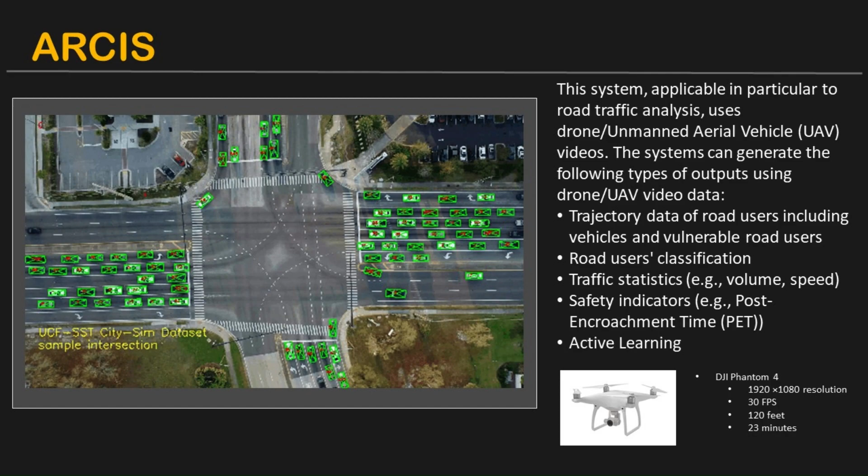Okay, so this is the software basically. So we do a lot of steps in order to use this software. This one is a really sophisticated software, and we have the ability...

When you fly a drone, the drone is moving, right? So you have to stabilize the video, because the drone with the wind sometimes is moving. So this is the first step, and then we have the ability also to stitch videos from many drones so that you have a long segment that you want to study.

And then we obtain the trajectories and all the statistics, and then we use that for data visualization and calculating the TTC, etc. So it's very sophisticated, and then also we have active learning to improve so that the system improves as it runs more and more.

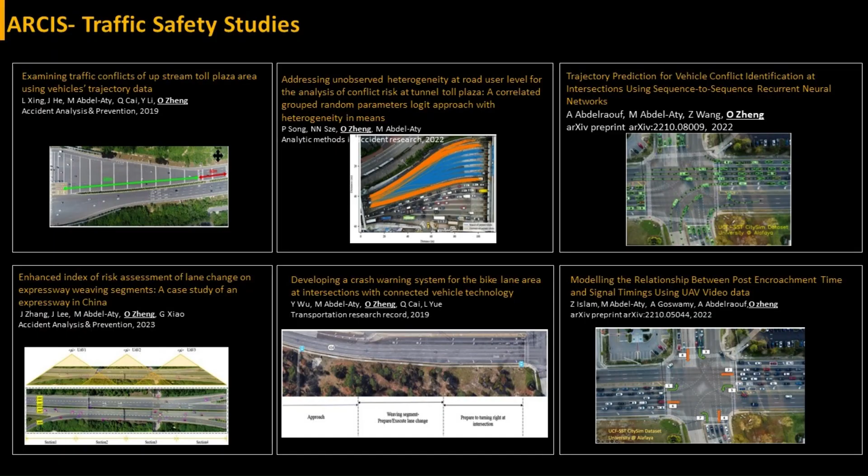This is some of the locations that we analyzed using these videos, and you can see these are all now papers. I can tell you the first one is the approach to a Toll Plaza in Nanjing, China. And the second one is the approach to, I think, a tunnel in Hong Kong.

You are familiar with this place? Really? It's your advisor, right? Yeah, so Sze, Tony Sze is her advisor, who is a co-author on this paper.

This is an intersection in Florida. And I think this is also an intersection and a bike lane in Florida. Then this is a weaving section in China, I think in Chengdu. And these are three drones, so in order to cover the whole weaving area, we have to fly 3 drones and then look at the whole video.

By the way, this data we opened it, so it's online. If you are interested to study any of these locations and get the trajectories, we can provide you these trajectories. We first used it ourselves, tested it, etc., then we opened it for researchers. So far, about 100 university research institutes and vehicle companies are using this data set. So this is a resource available for you.

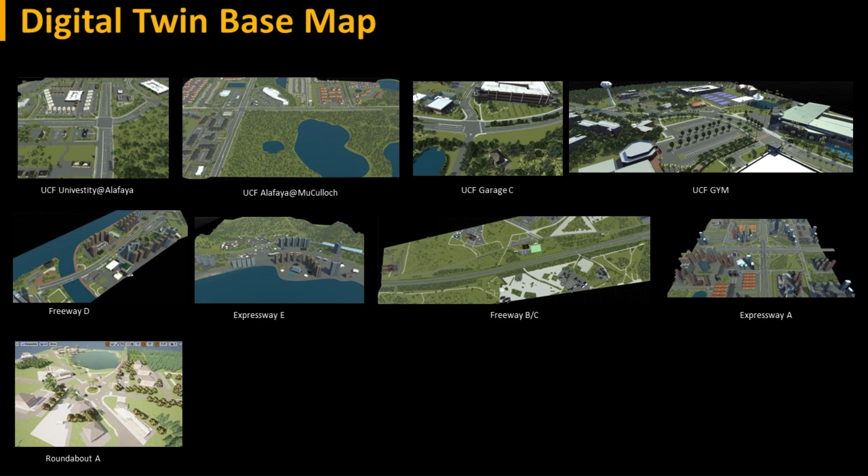Another system we developed uses roadside cameras, and not only roadside cameras, but CCTV cameras. Many video systems install high resolution specialized cameras on the side of the road, but I'm not very interested in that because these are expensive. I'm interested in the CCTV cameras that the government already provides for traffic management. These are free, right? How can we use them to improve our applications in transportation?

To give you an idea, in Florida we have 18,000 cameras on the road, as if you have 18,000 people looking 24/7. And machine learning is the brain, right? So you're thinking, you're looking, you can do everything, you can capture everything you want. This is where we are heading.

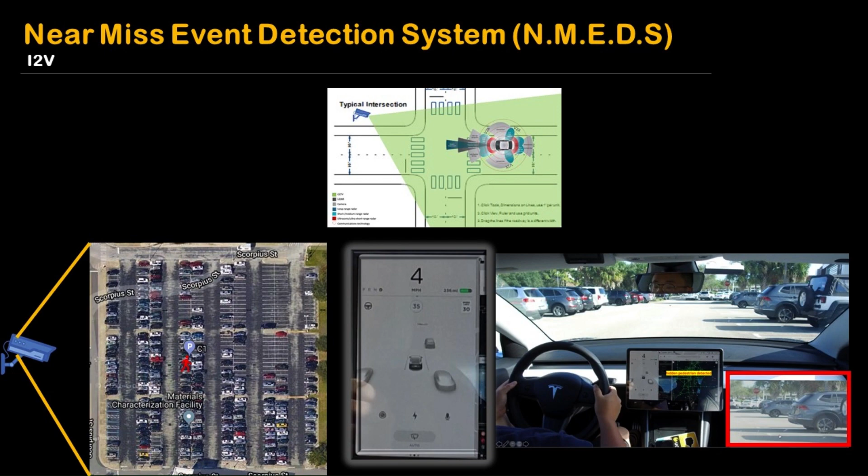So if you work with safety and you have a problem, you discover there is an intersection that has a lot of accidents. You report it to the government, or the government notices the statistics and says this intersection has a problem because over the last 3 years we've had more than 50 accidents per year, and maybe a few people were hurt. So this is the first step. After 3 to 5 years you discover there is a problem. You bring in a company, a consultant, and they do a study, take a lot of money, and tell the government now you need to change that.

So you change that, pay them more, and then you have to wait another 2-3 years to see whether the accidents went down or not. This is what's called a before and after study, very typical in safety. But guess what, how many years did you wait, and how many people got hurt before you concluded whether the problem is solved or not? This is very inefficient. With a lot of intersections, a lot of drivers, a lot of problems, you cannot keep up. You cannot spend all the money at all the intersections.

It's impossible. So here what we are suggesting is we either fly a drone or look at the CCTV, and using machine learning and computer vision, we determine what the problem is. So fly for 2 days, 3 days, a week, and collect these videos, processing them with our software.

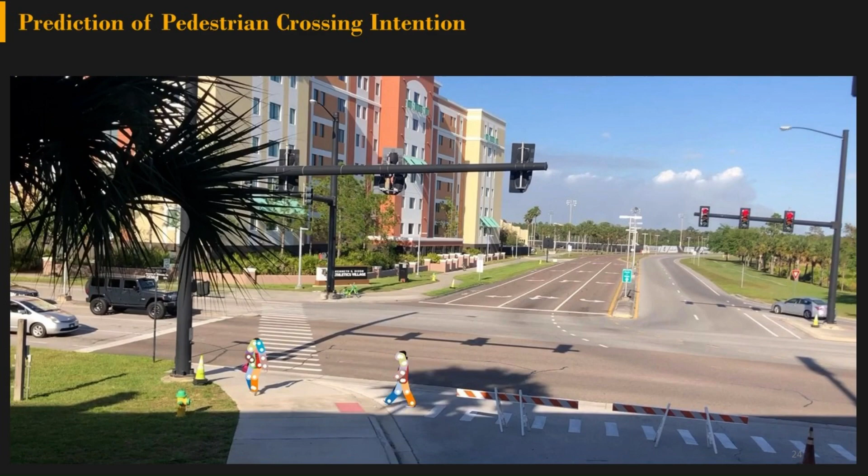Then you fly the drone for another couple of days and the problem is gone. So in 2 weeks you achieve what we used to do in 5, 6, 7 years, at very low cost. So this is an efficient way to do safety evaluation.

Another application is using cameras to help autonomous cars. As you can see, the autonomous car on top has all these sensors - you see this picture a lot. The autonomous car is moving, all the lidars and cameras covering this area. You can see all these shapes are basically what the car is seeing around it.

Now, what if this car intends to turn right, and there is a pedestrian at the corner crossing the road? The car cannot detect that. But the camera on the road, showing all this green area, can see it. So the solution is that the camera detects the pedestrian. Using connected vehicles, this information goes to the autonomous car, so the autonomous car knows there is a pedestrian around the corner. This means autonomous cars by themselves cannot operate in all situations - we need help from the infrastructure, and the camera will be that help.

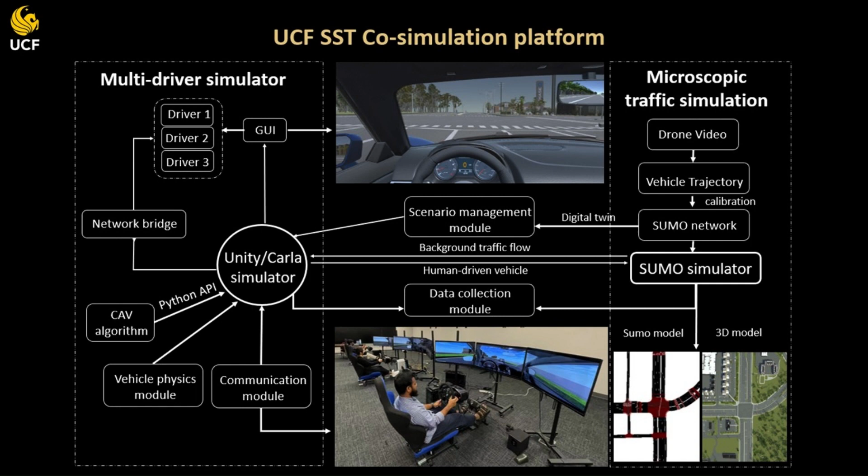So basically, 3 drivers are connected to each other. At the same time, the micro simulation is running and generating vehicles that appear in their scene, driving scenarios. Remember the open data set and digital maps for the different locations? We can drive them now because we are modeling this using Unity.

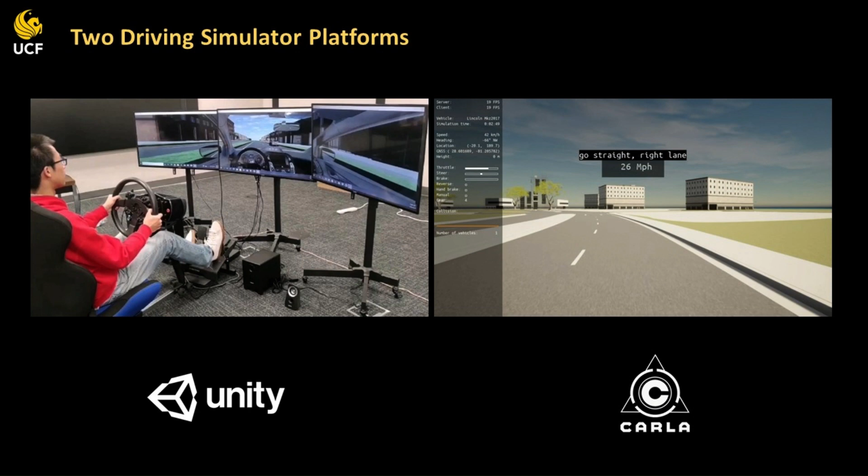There's a lot of connections between the systems, and what I'm not showing here is that the whole system is connected to a cave, a room in a different lab where we are simulating the pedestrian. The pedestrian is walking in this cave, and the driver here sees the pedestrian crossing the road or approaching the vehicle, while the pedestrian sees the vehicle in this lab approaching. So pedestrian-in-the-loop simulation is also doable with this system.

And this helps us create what's called digital twinning. You are basically representing reality in the digital world, and then you take something from the digital world and implement it in the real world. This connection between the digital and real world is the digital twinning we are talking about.

Some animations here to show you the Unity platform and Carla platform. Again, the 3 connected simulators. These are all students in my lab, and these are the digital twinning examples I was talking about.

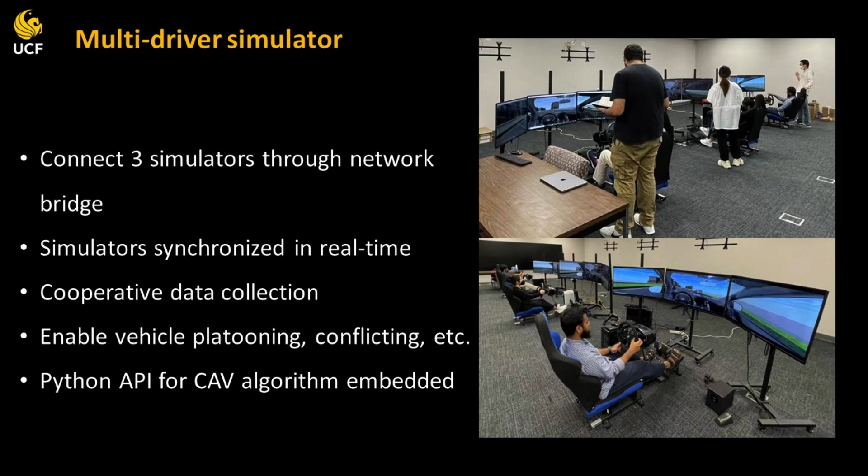And then we use SUMO to generate the traffic that the driving simulator drives in. By the way, a side note: we don't use traditional calibration and validation anymore for traffic simulation. So instead of counting the number of vehicles, we use drone trajectories to calibrate the micro simulation, making it a vehicle-by-vehicle calibration rather than counting cars over 15 minutes. It's a very accurate calibration of our SUMO model.

Some examples to show you all views of the same scene. This is what I was telling you about the drone video. The same location in SUMO, the same location in Carla, the same location in a driving view. This is all the same thing, just in different applications.

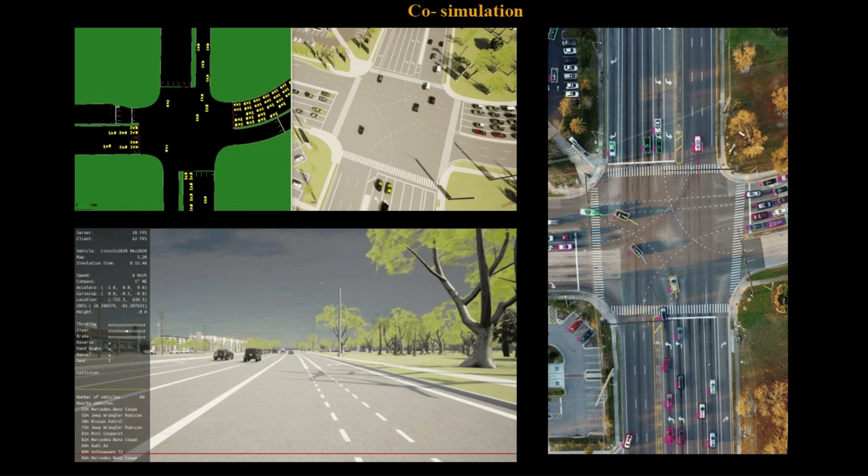Can you advance it from your side? Yeah, this is also just to give you an idea of the difference between Unity and Carla, how it looks, the difference between them.

And then, of course, we use this for many studies. I want to go one back.

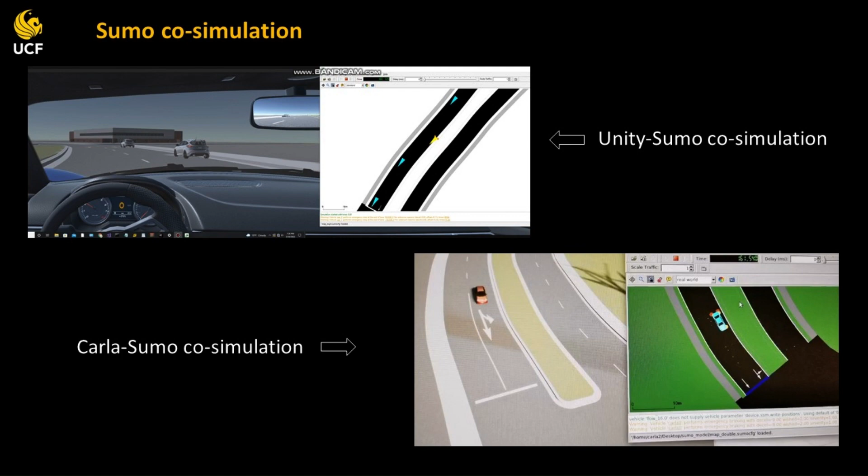And then finally, I want to talk a little bit about the data analytics side. We talked about big data, etc. This is an award-winning system we developed for prediction of accidents, or prediction of increased potential of accidents, in real time. Basically what we're doing is something my lab has been working on for the last 20 years - how can you predict in the next 5+ minutes if there's a high potential of an accident? So how do you do that? We know we're getting all this data in real time. If we relate this data to historical accidents, we know what conditions preceded historical accidents. So in the future, this type of algorithm will tell us if in the next 5-10 minutes there's a higher potential of an accident. Of course, it's not as simple as that - it's a long story, but that's the idea.

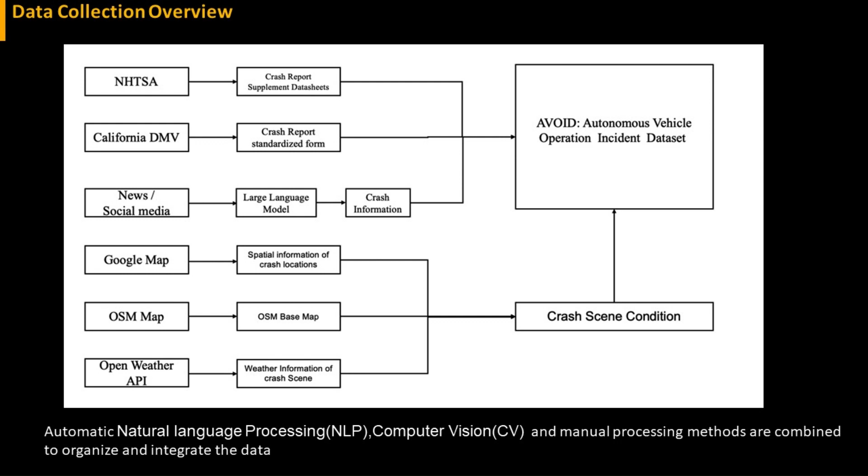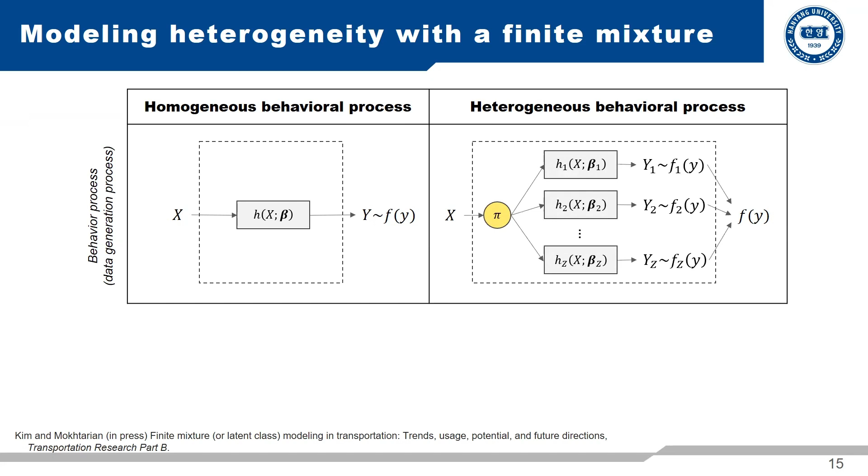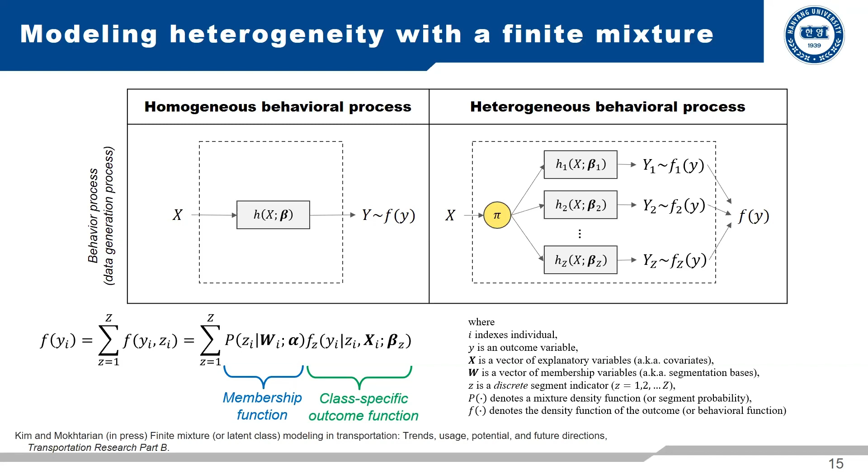But as I said at the beginning, we think there are segments of people - types of people who have really different behaviors. If we distinguish their behaviors, like H1 through HZ, then we have multiple different types of models all together. What we observe in society is the consequence of the mixture of multiple travel behaviors. If we formulate it in an equation, it looks like this. I want to highlight that the equation may look very simple, but we can customize individual elements, so the model structure itself is very flexible. I'm going to skip the details about the equation.

I want to note that there are different types of mixture models, but I'm going to focus on the particular type called the latent class or finite mixture model.

I want to highlight that this model has been used a lot recently in transportation literature, particularly in travel behavior research. The share of publications using this approach is increasing, and when I apply topic modeling to the literature, different subdomains pop up in transportation.

In a recent paper, we proposed a typology of the heterogeneity that we can model. There are several types, but for the sake of time, I'm going to skip this part. Again, I'm very sorry for the hasty presentation.

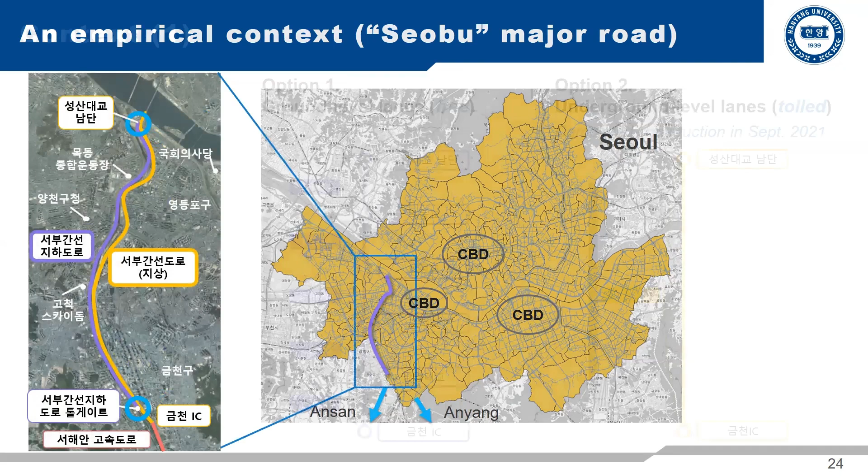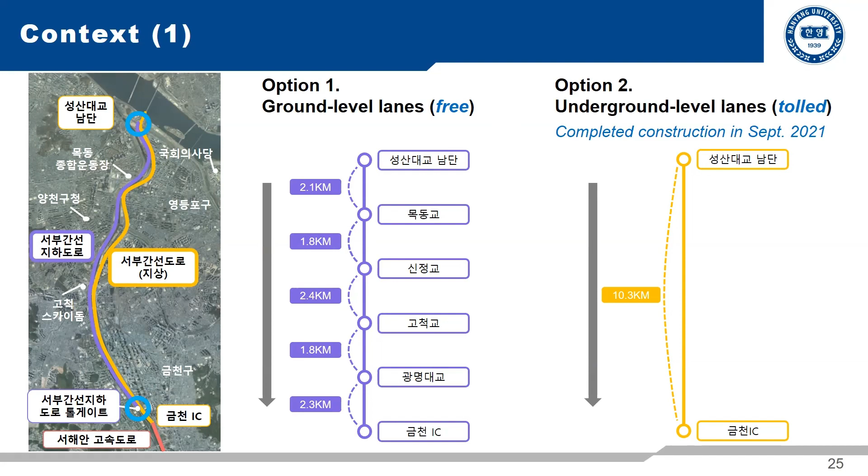There are actually 2 options. The first option is the ground level lanes, which are free. It has been there for several years, but it's highly congested, always congested. So we built a new parallel road at the underground level, and it's a toll lane, meaning there's a fare we need to pay for it. It opened in September 2021.

So the question is, how do we model how people choose between the free versus toll lane? Are people willing to pay $2 to reduce a certain amount of travel time? That's the question.

We are collecting data, and it's still work in progress. We have undergrad students, a capstone team, taking video of the entrance and trying to automatically identify the vehicles, vehicle types, and traffic counts. It's still in progress, not yet finished.

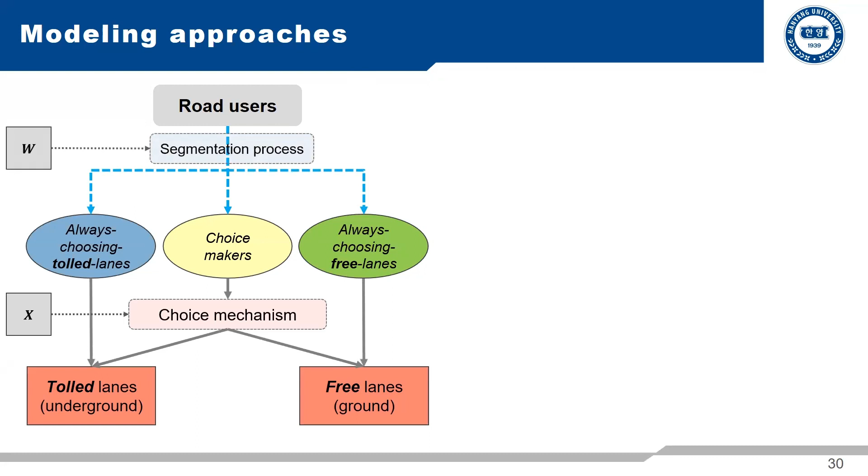So here comes the latent class model. What I propose is this: we need to identify who are the actual choice makers and who are not. But if we simply apply the typical latent class model or other machine learning models, I can guarantee the results will not be intuitive because it includes that kind of people.

So that's why we need to embed our knowledge into the latent class formulation. That's where analysts should put their knowledge into the model formulation. So that's one of the drawbacks, one of the key points.

Okay, so I will move on to the next section, but how many minutes do I have? 10 minutes, okay. I think I kind of missed the mark because usually audiences are undergrad students, so the topic is a bit grad-level. Please forgive me.

But there are several issues here. One is that our typical approach assumes heterogeneity is not observable. What that means is we cannot see that heterogeneity directly, so we apply the model and identify it based on the data or the model.

If possible, observed heterogeneity is preferred over unobserved heterogeneity, because if we apply a heterogeneity model, sometimes the results are very interesting and meaningful, but in the end it is hard to make a policy recommendation.

One anonymous reviewer of the paper cast doubt on the usefulness or validity of the results. I want to highlight this situation, particularly for grad students who are just looking for fancy models.

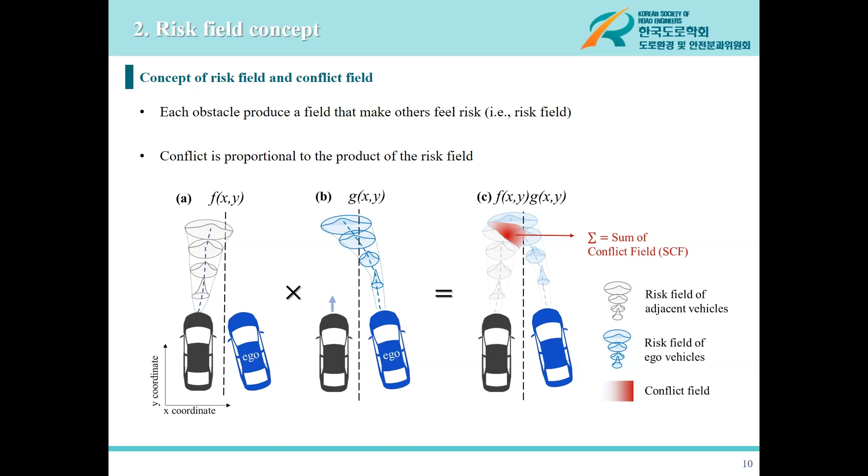그러면 그건 바로 우리가 상충이다라고 정의를 할 수 있겠고, 이 각각의 디스트리뷰션, 이 각각 어떤 인공적인 장, 위험장이다라고 해서 리스크 필드라고 이름이 붙여져 있습니다. 그래서 이 리스크 필드들이 이루는 이런 어떤 디스트리뷰션이 겹치는 부분이 있겠죠. 이 겹치는 부분이 바로 상충이고, 이 상충의 크기가 크면 상충이 발생했다라고 말할 수 있는 겁니다.

조금만 자세히 넘어가는데 간단하게 하고 넘어갈게요. 이 개념은 우리가 앞에 궤적을 예측을 하는데, 너무 뒤에 있는 궤적은 별로 위험하지가 않아요. 우리가 10초 뒤 차량이 움직이는 거를 다 고려하진 않잖아요. 그래서 적절하게 할인을 해주는 겁니다. 절반씩 할인을 해주고, 할인된 걸 가지고 이제 우리가 상충을 평가하게 되는 거예요. 그러니까 많이 뒤에 있는 거는 우리가 전혀 위험하지 않다라고 보게 되는 거죠.

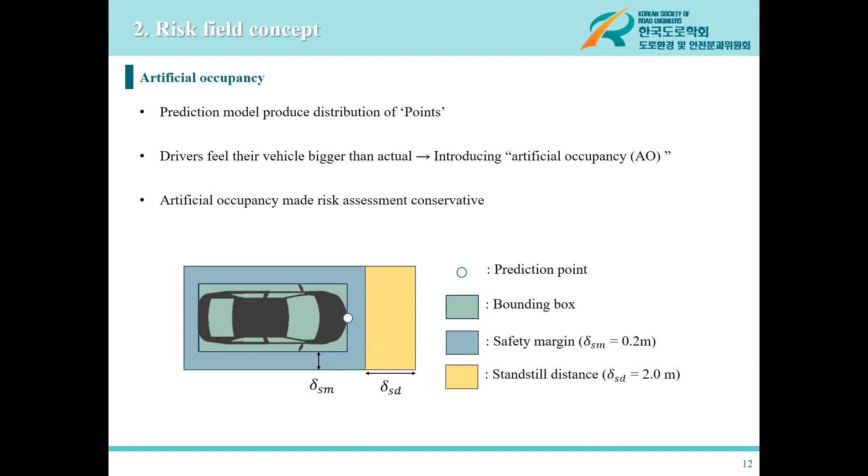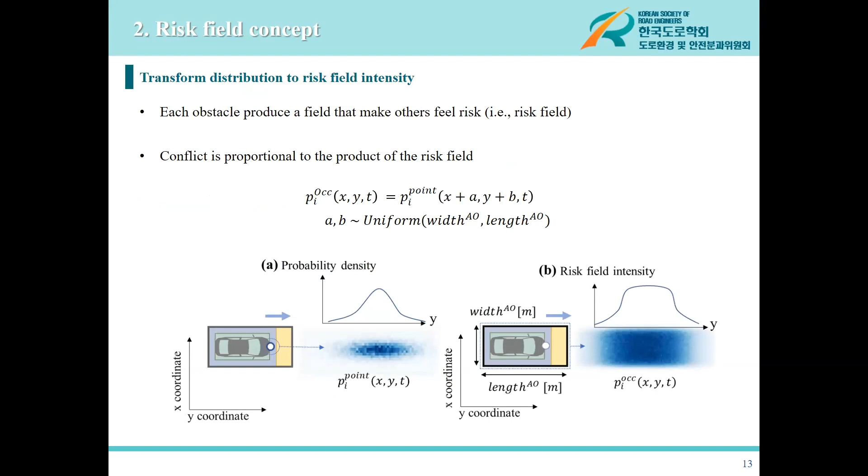실제로 우리가 어떤 점을 가지고 계속 얘기를 할 수 있지만 사실 차는 점이 아니잖아요. 그래서 차 안에 우리가 어떤 예측을 할 때 기준점이 필요하겠죠. 이 프레딕션 포인트가 이 차 주변을 이렇게 둘러싸고 있다고 보면 될 것 같습니다. 실제로 우리가 바운딩 박스라고 하는 걸 가지고 안전성 평가를 하는데, 실제 운전하다 보면 조금 폭을 두잖아요. 그 개념이 세이프티 마진으로 들어가고 앞차랑 정지해 있으면 또 바로 붙이면 안 되니까 그런 스탠드스틸 디스턴스까지 넣어서 이 프레딕션 포인트가 어떤 인공적인 점유 공간을 우리가 점유하고 있다라고 보시면 될 것 같고, 이건 모델링을 어떻게 할지에 대해서 간략하게 넣고, 쉽게 말해서 그냥 저 박스 안에 저 점들이 그냥 가득 차 있다라고 가정하면 하는 모델입니다.

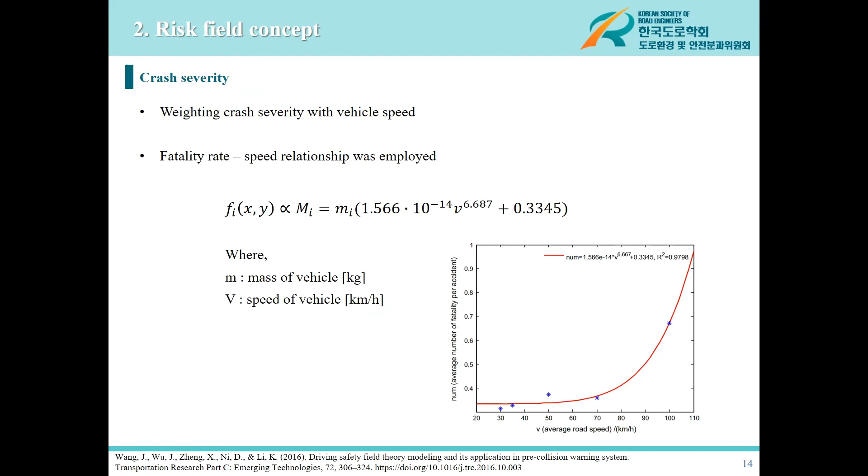마지막으로 차가 또 빨리 움직이면 사고의 심각도가 높잖아요. 차가 빠르면 사고가 날 가능성도 높고 심각도도 높으니 그거만큼 리스크 필드에 더 위험을 많이 느낀다라고 가정한 모델이라고 보시면 될 것 같고요. 결과적으로 보면 식은 이런 식으로 나옵니다.

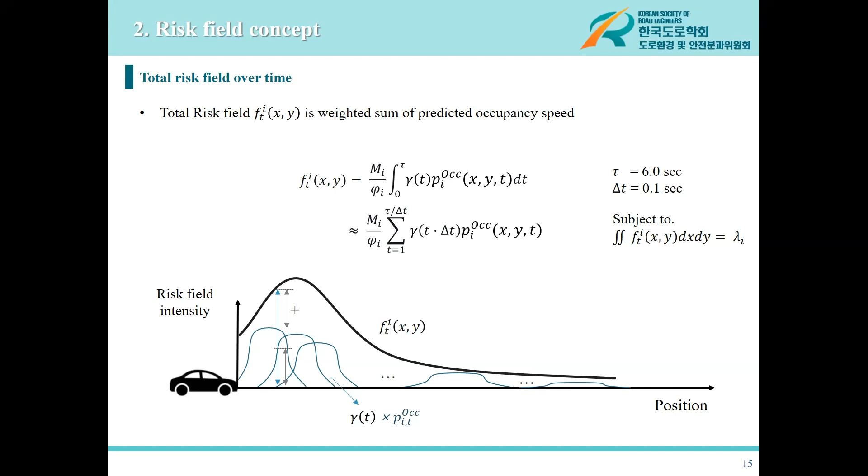어떤 차가 이거를 옆단에서 보면 각 차들의 점유하는 위치 공간에 대한 어떤 디스트리뷰션들이 다 합해져서 검정색의 어떤 분포가 나오고, 이 검정색 분포끼리 여러 개가 생기는 거죠. 내 차 주변에 모든 이 검정색 분포들을 가지고 우리가 상충을 평가를 하게 됩니다. 그럼 결국 이런 식으로 나오는데, 그럼 빨간색으로 나오는 저런 상충장이라고 정의를 했었죠. 이 상충장 크기가 바로 우리가 어떤 새로운 컴플리트 상충이라고 볼 수 있는 겁니다.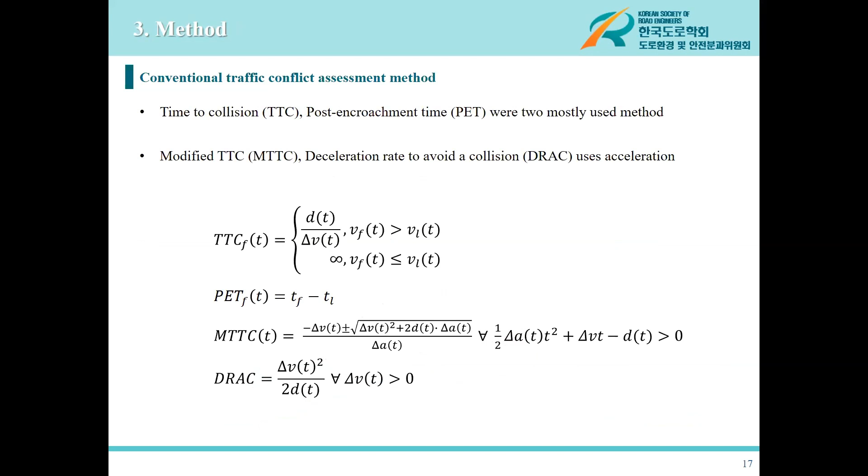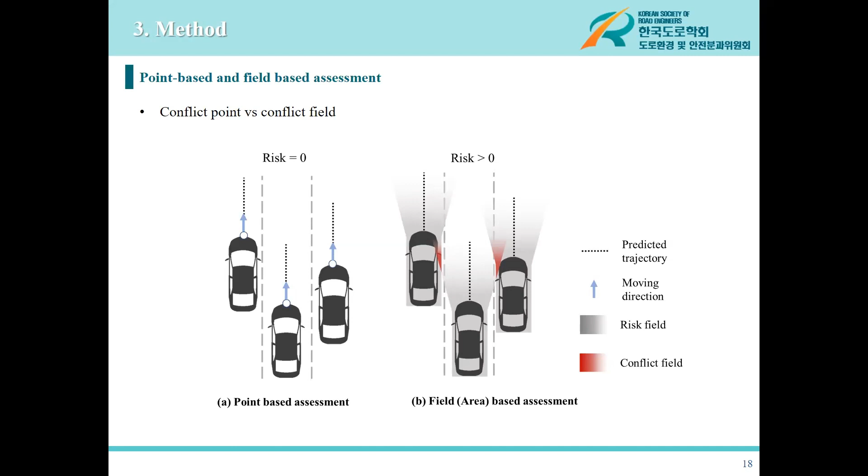그래서 이런 점들도 좀 보완을 하고, 또 가장 큰 문제가 아까 얘기가 잠깐 나왔지만 이 차량들은 점이 아니에요. 점이 아닌데 이대로 쭉 달리고 있다 보면 이 점들끼리 겹치지 않으면 전혀 사고의 위험이 없다라고 하면 조금 우리가 그렇게 동의하지 못하죠. 하지만 이게 점이 아니고 이 차량들이 점유하는 면적을 가지고 보면 얘네들 간에 어떤 겹침이 존재한다. 그래서 이 겹침의 정도가 크면 우리가 위험하다라고 말할 수 있는 거죠. 그런 부분에 있어서 기존의 방법론과 조금 차별점이 있다라고 말씀드릴 수 있을 것 같습니다.

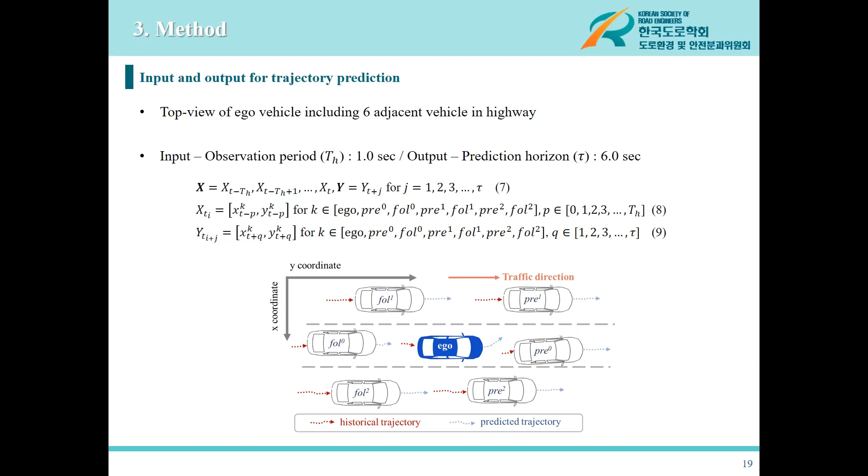그러면 결국 예측을 해야 되잖아요. 고속도로 상황에서 가장 사고가 날 만한 6개의 차량을 매칭을 하고, 그 차량을 1초 동안 관측을 한 걸 가지고 앞으로 6초간 내 주변의 차량들이 어떻게 움직이는지를 예측을 하는 문제를 풀게 됩니다.

사실 딥러닝 구조를 쓰긴 했는데 어쨌든 굉장히 복잡한 예측 문제를 하잖아요. 내 1초에 6대 차량의 어떤 궤적을 가지고 6초 뒤까지 예측을 하는 거다 보니까 일반적인 통계 모델로는 어려워서 딥러닝 모델 구조를 활용을 했고요. 그리고 궤적 예측에 있어서 가장 중요한 이슈 중에 하나는 일단은 우리가 사실 평균을 예측할 수 있잖아요.

이게 가장 기본적인 가정이고, 그러면 우리 문제에서 어떻게 해야 되느냐. 어떤 차량이 있을 때 감속이냐 가속이냐 두 개 중에 하나, 좌회전, 우회전, 직진 이렇게 해서 총 6개의 가능성이 있다라고 가정을 합니다. 그래서 이 6개의 가능성을 가지고 우리가 얘네들의 가중합해서 어떤 차량의 확률을 모사할 수 있다라고 가정을 하면 됩니다.

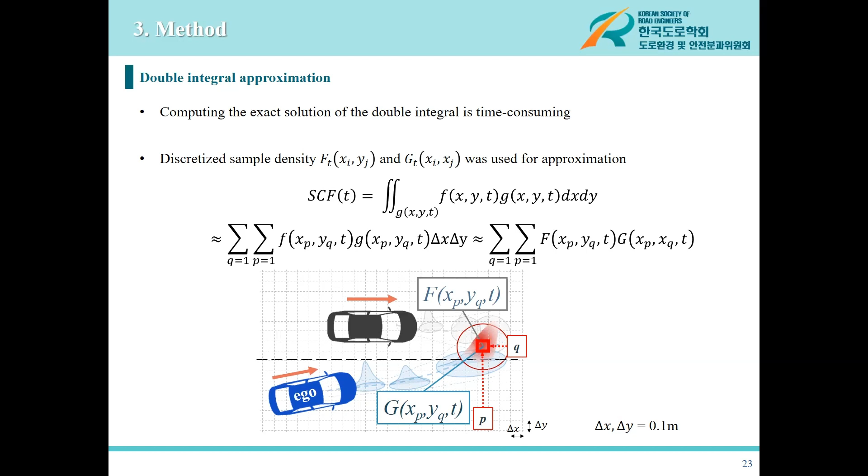마지막으로 스킵하자, 마이너한 이슈이긴 한데 우리가 이중 적분을 해야 돼요. 근데 이게 실시간으로 하다 보니까 꽤 모델이 무거워져서 한번 근사를 시킨 거라고 보시면 될 것 같습니다. 그래서 근사를 하게 되면 결국 우리가 실제 값을 얻는 데는 한 10초, 20초 걸릴 수 있어요.

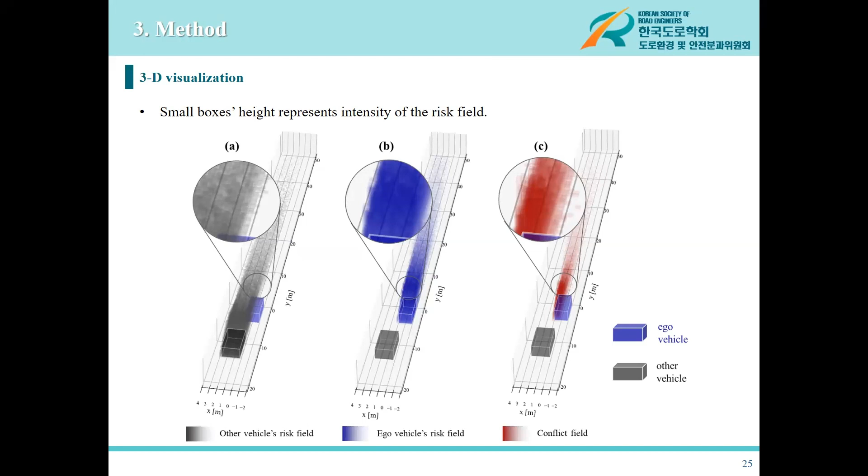보시면 지금 검정색으로 표시된 게 내 차가 아니고 내 뒤에 차예요. 내 뒤에 차가 실제로 저런 인공적인 장을 생성하고, 이 생성된 장이 파란색으로 표시된 내 차와 겹치는 빨간색 순간, 그림 C에 나와 있는데 이 겹치는 공간이 바로 위험한 공간이죠. 이게 어느 순간 넘어가면 우리는 차선 변경을 못하는 거예요, 하면 안 되는 거죠. 그러니까 그런 식으로 상충을 평가할 수 있게 되고, 이렇게 되면 점으로 가정했을 때보다 훨씬 더 보수적인 평가 결과를 얻고, 그러니까 우리가 좀 더 이 차를 믿을 수가 있겠죠.

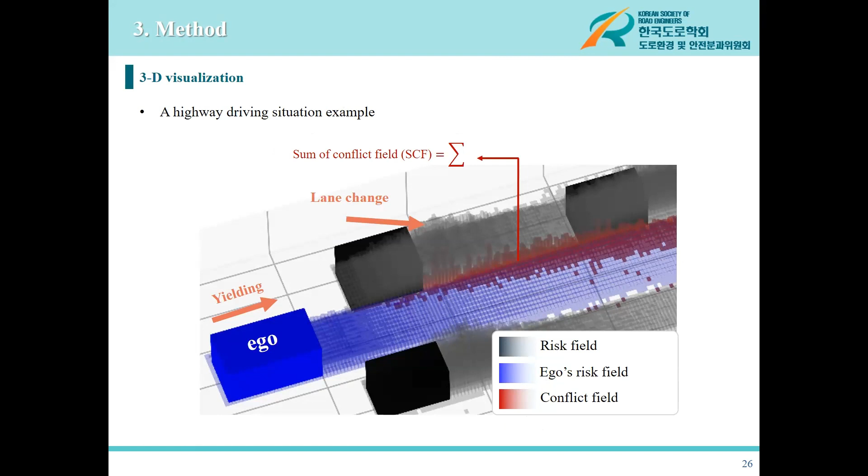그래서 가까이 보면 이런 식으로 나오겠고, 이 차량 바닥면에 어떤 박스들이 뿌려져 있는 형태로 지금 나와 있어요. 이 박스의 높이가 높으면 그만큼 위험한 공간이라는 거고, 빨간색이 높으면 그만큼 다른 차량과 상충할 가능성도 높아진다라고 보시면 될 것 같습니다.

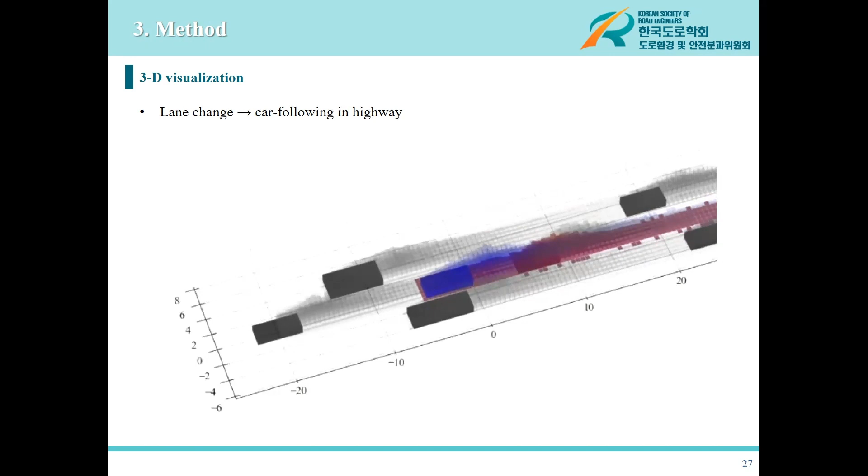일단 이거를 매 순간순간마다 이렇게 그릴 수 있겠죠. 0.1초마다 구할 수 있으니까 0.1초마다 플러스를 해보면 이런 식으로 빨간색 영역들이 발생하고, 이것들이 많아지면 차가 갑자기 뒤로 가죠. 이런 식으로 상충이 얼마나 발생했는지를 매 순간순간 연속적으로 평가할 수 있다고 말씀드릴 수 있을 것 같습니다.

그래서 실제 데이터에다가 적용해 본 거고요. 미국의 한 도로에 적용을 해본 결과, 차선 변경이 한 4.2%였고 대부분은 앞차를 따라간 상황이긴 했는데, 이 둘 사이의 전환을 굳이 구분을 안 해도 하나의 지표로 평가할 수 있으면 우리의 본래 목적을 만족하게 되는 거죠.

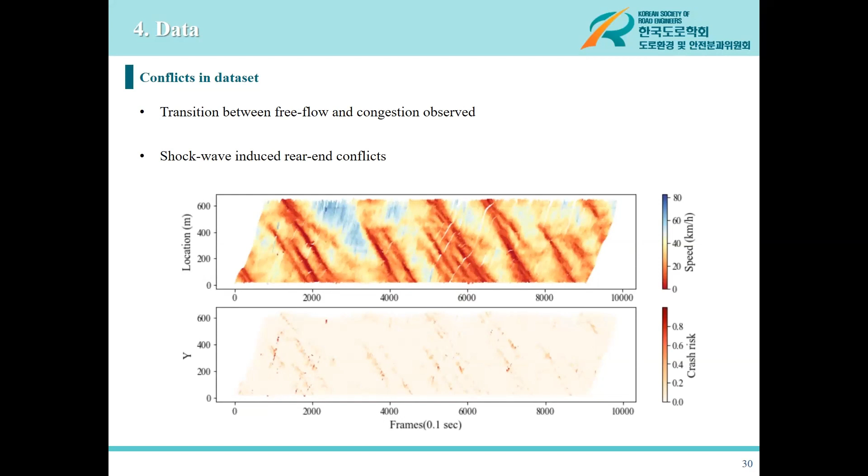그래서 궤적을 한번 그려보면 이건 시공도예요. 수업 시간에 배우셨을 텐데, 차량의 속도랑 시간 그리고 위치 그래프를 나타낸 건데, 지금 보면 상충들이 굉장히 많이 나타나고 있죠. 앞차가 갑자기 느려지면 내 차량이 갑자기 가까워지잖아요. 그런 것들을 나타낸 거고, 밑에 크래시 리스크를 보면 특정한 길을 따라서 쭉쭉 펴져 나가는 거 보니까 이 데이터가 상충을 연구하기에 굉장히 괜찮은 데이터다라고 볼 수 있을 것 같습니다.

실제로 보면 A, B, C, D라고 나와 있는 요거는 차선 변경하고 바로 앞차를 따라가는 추종 상황을 연속적으로 나타낸 그래프입니다. B에서 보면 지금 차선 변경을 하고 있는데 L0랑 F0라고 나와 있는 이 구간의 갭이 굉장히 짧아요. 그렇다 보니까 이거는 굉장히 위험한 상황이죠. 사실은 차선 변경을 하면 안 되는데 일단 이 차는 차선 변경을 하고 있습니다.

그래서 순간순간 이 차선 변경이 완료됨에 따라서 얼마나 이 지표가 더 위험하다라고 나타내는지를 보여주고 있는데요. 지금 검정색으로 나타낸 게 빨간색으로 나타낸 영역의 부피를 모두 다 계산한 값입니다. 그 크기를 보면 처음에 B에 있을 때는 굉장히 작다가 C로 가면 L0로 나타낸 차량과 상충이 엄청 커져서 굉장히 끝에 값까지 올라가고 있죠. 이런 식으로 매 순간순간 연속적으로 나타날 수 있습니다.

이 방식이 왜 좋냐라고 하면 결국 아까 말씀드렸던 이 차량이 점이라고 가정하지 않았잖아요. 점이 아니고 어떤 공간을 점유하기 때문에 매 순간순간 신뢰도 있는 값을 얻을 수 있습니다.

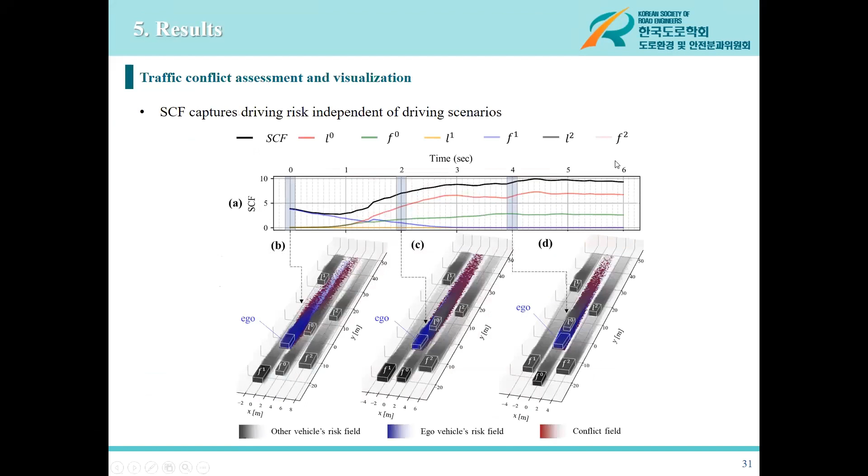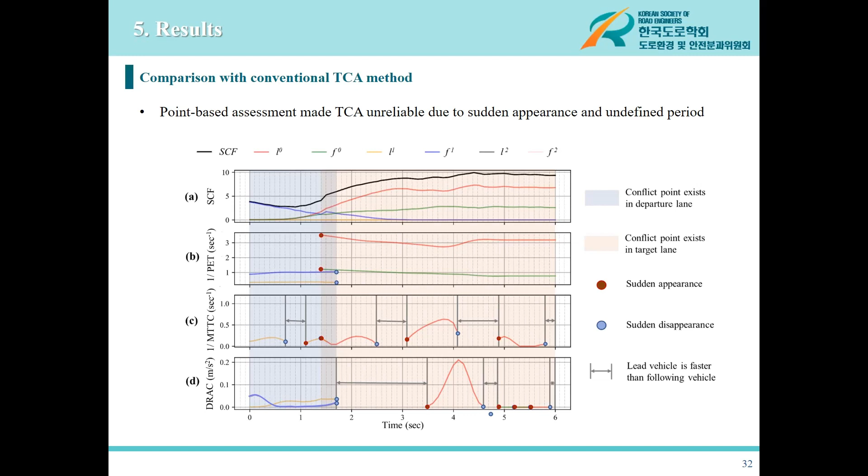제안한 지표가 조금 더 신뢰도를 많이 얻었다. 여기에 더해서 기존 지표들은 앞차가 좀 더 느리게 와야 조금 더 위험하다고 판단하거든요. 근데 제안한 지표는 앞차가 느리지 않고 충분히 가까웠고 이 차량들이 겹치는 위치가 많으면 많을수록 더 위험하다고 판단하기 때문에 훨씬 더 믿을 만한 지표다라고 말씀드릴 수 있을 것 같습니다.

그래서 기존 지표들과 통계적인 연관성을 한번 확인해 봤고요. 타임 투 컬리전이랑은 크게 관련이 없었는데, 가장 큰 이유는 타임 투 컬리전은 앞차가 더 빠르면 위험도가 제로다라고 말을 해버리는데, 그걸 실제랑 제가 생각할 때는 맞지 않다고 봤어요.

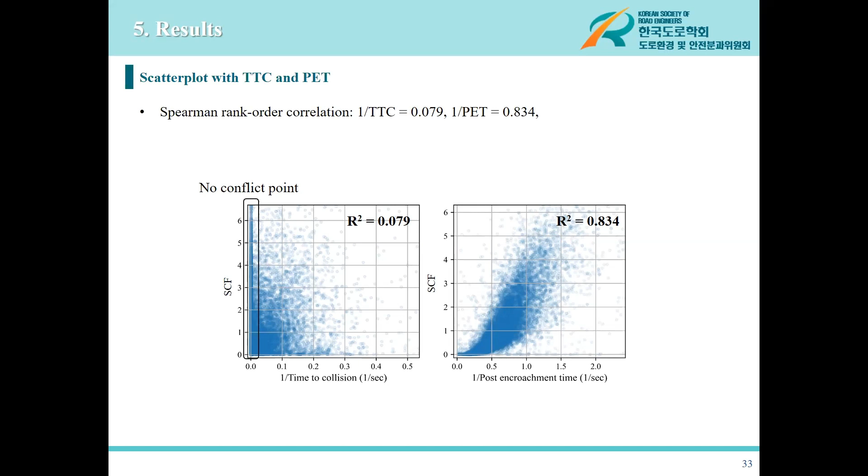그래서 그런 부분에 있어서 상관성이 굉장히 적게 나왔고, Post Encroachment Time, 즉 앞차가 떠나고 난 지점을 내가 몇 초 뒤에 가느냐랑은 굉장히 유사한 결과가 나왔습니다. 제안된 지표는 PET라는 지표와 조금 더 가까운 지표고 나머지 두 개의 지표도 비슷한데, 결국 앞차가 이 차랑 가까워져야 정의가 되는 지표들입니다.

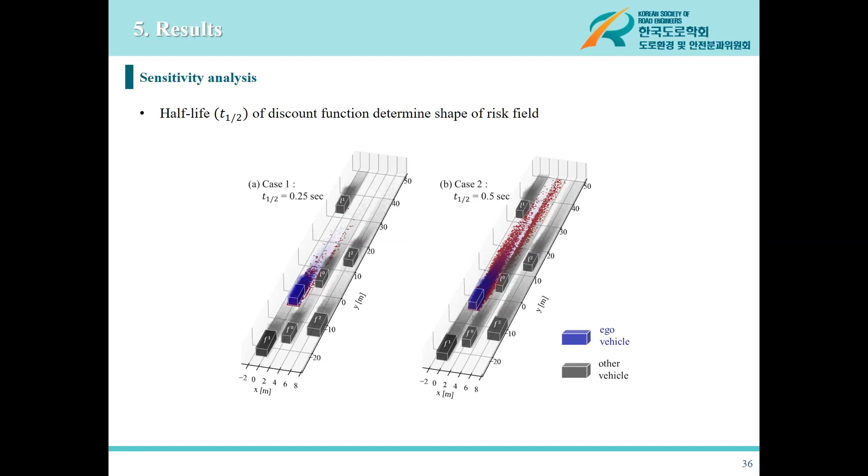그리고 이를 실제 데이터에 적용해봤습니다. 결국 차선 변경인지 추종 상황인지 구분할 필요가 없고, 여러 차량이 동시에 상충하면 상충의 크기가 커지므로 여러 대의 상충에 대해서도 동시에 평가할 수 있습니다. 확률적인 모형을 사용했기 때문에 불확실성에 대응할 수 있는 모델을 제안한 것이라고 보면 됩니다. 어떤 지점에서 위험한지 시각화할 수 있고, 실시간으로 근사해서 0.1초마다 계산할 수 있도록 모델을 가볍게 만들었습니다.

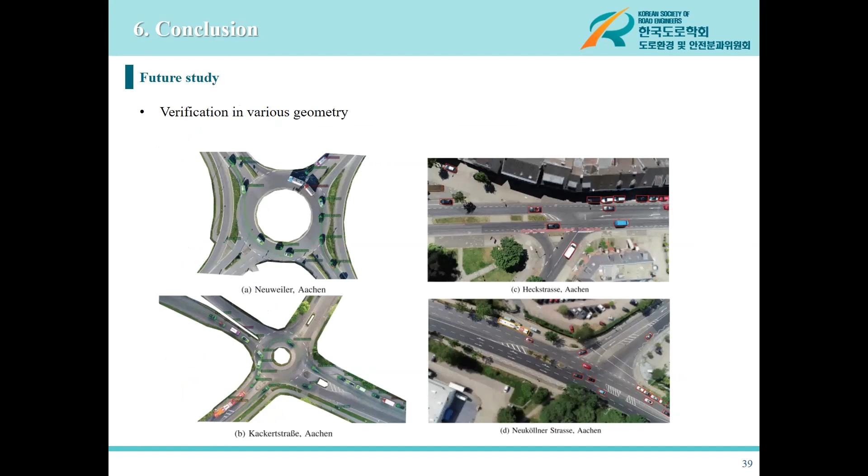향후 연구로는 지금까지 고속도로 데이터만 했는데, 이를 드론 데이터나 보행자가 섞여 있는 데이터셋에도 적용하면 충분히 확장 가능성이 있는 방법론이라고 볼 수 있습니다. 신호등이 없거나 보행자와 차량, 자전거가 섞여 있는 상황이나 대학 캠퍼스 같은 곳에서도 충분히 적용 가능하고 시각화도 가능하기 때문에, 위험하다고 경고를 주는 것도 가능하겠습니다. 이상입니다. 감사합니다.

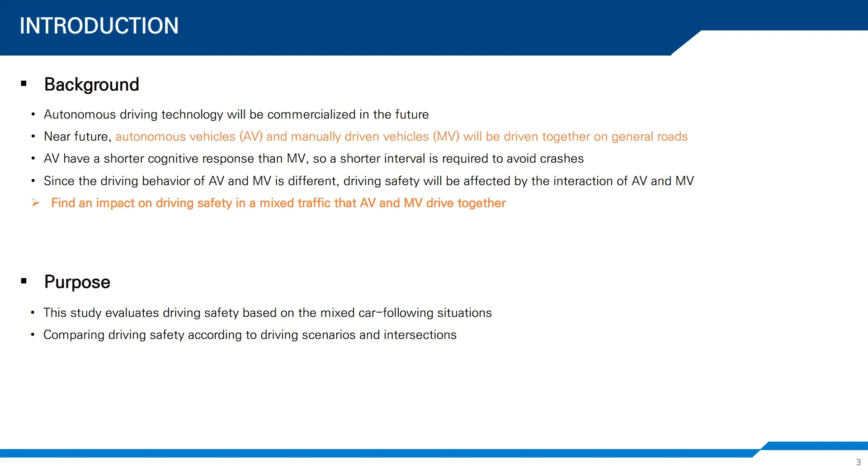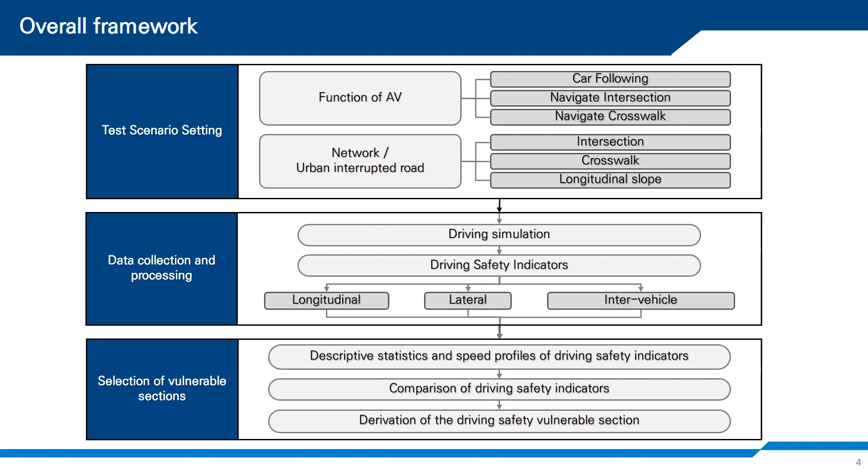To implement the AV in the simulation, this study performed 3 steps. First, we defined the requirements to implement the ideal autonomous vehicles. Second, behaviors of AV were investigated, and some were selected which are necessary for the simulation. And third,

AV behavior was referred to the autonomous driving system of the National Highway Traffic Safety Administration, which we call NHTSA. Third, we produced the AV driving algorithm in consideration of the requirements of the AV, and it was put into the simulation. The detailed description of each step will be explained in the following chapter.

Step 1: this study set the requirements of AV maneuvering by this assumption, that driving behavior of AV and MV is different. First, AV cannot cause a collision by themselves, because AV maneuvers with safety and no crash caused by driver mistake, due to its fast reaction time.

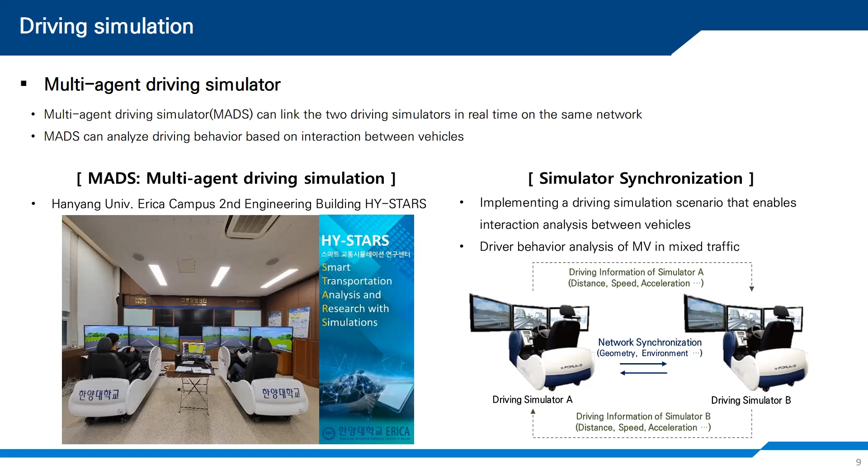This is the main theme of simulator synchronization. Through the network connection of driving simulation, information of the vehicle can be shared in the simulation, which allows analysis of driving behavior of AV in mixed traffic.

This page shows the simulation scenario. Total 30 subjects were recruited, and data was collected from December 23 to February 25. This image shows the simulation scenario of AV.

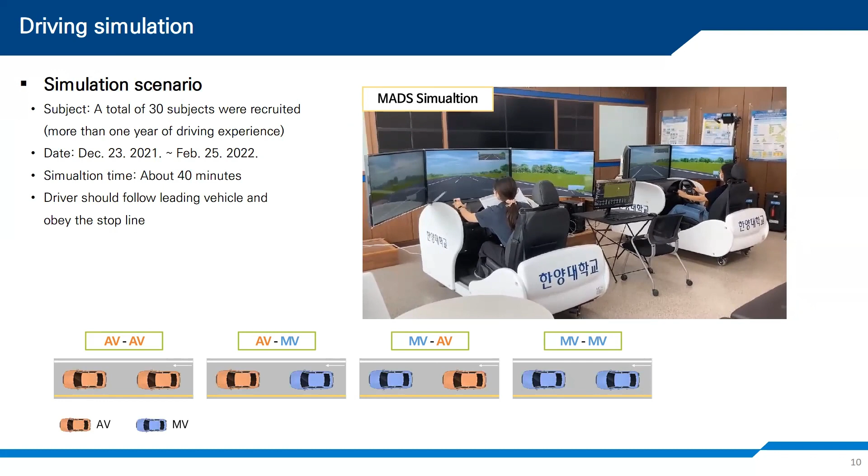As you can see, the driver on the left side did not control the maneuvering of the vehicle because she is riding in the AV, while the driver on the right side controls the vehicle to follow the leading vehicle.

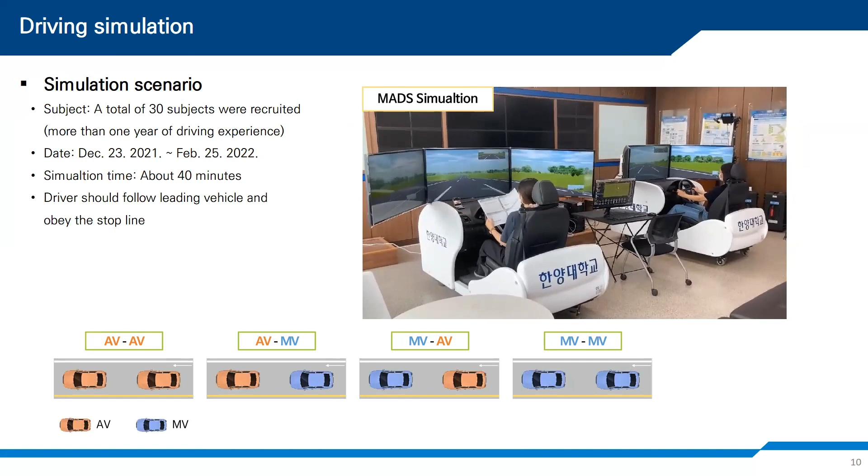Next is the network of the urban interrupted road, built by referring to road structure design guidelines and AV behavior. This network tries to implement road structure and signals in urban roads, with driving tasks for each section such as straight flat lines, U-turns, signal intersections, non-signal intersections, longitudinal slopes of plus 5% uphill and downhill, roundabouts, and crosswalks.

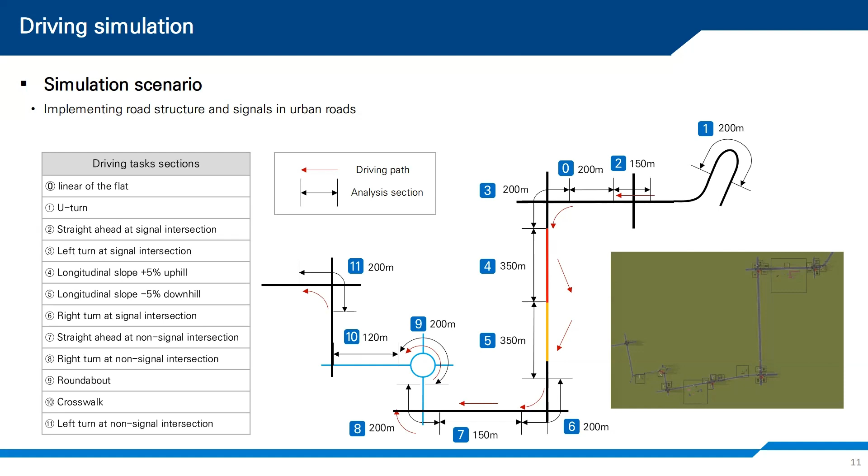The subjects participated in all pair driving sessions, and a total of 182 raw data points were collected. Data pre-processing and driving safety indicators were calculated using R.

Driving safety evaluation indicators were selected based on formal car-following research, such as acceleration change by interval, which we call acceleration noise, standard deviation of steering angle speed, and deceleration rate to avoid crash, which we know as DRAC.

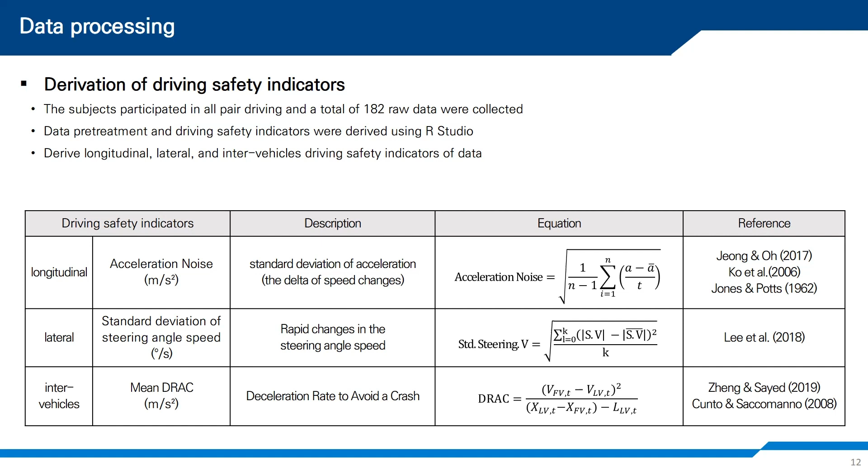This study derives the safety indicators of each section and tries to define where driving safety decreases. Next, we check the driving safety indicator at each section by descriptive statistics, and as shown in the table, color blocks emphasize the average indicator for each driving pair.

Blue shows driving safety is good, yellow shows moderate, and red shows bad. In this table, it was confirmed that the driving safety of AV was higher in all evaluation indicators, and it was found that the driving behavior of AV influenced MV motoring. The mixed pair influenced MV driving, shown here as the yellow block.

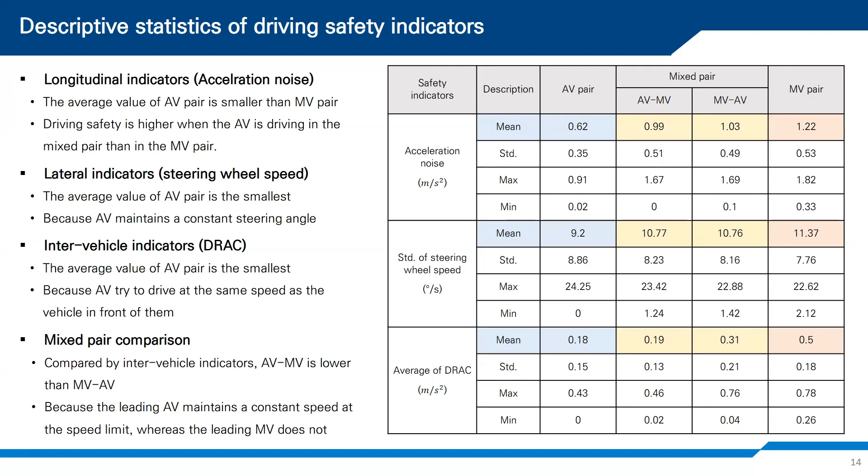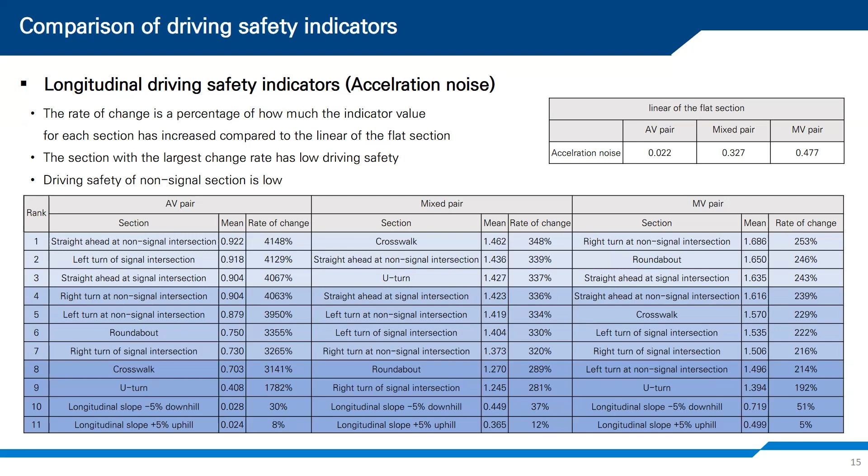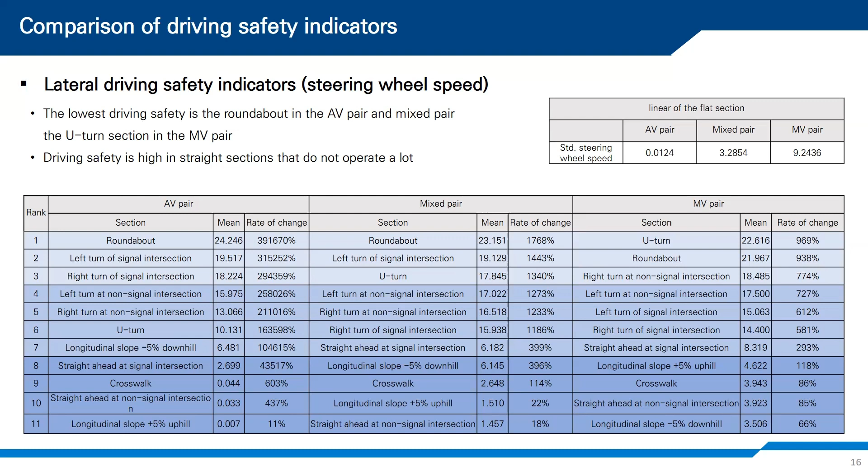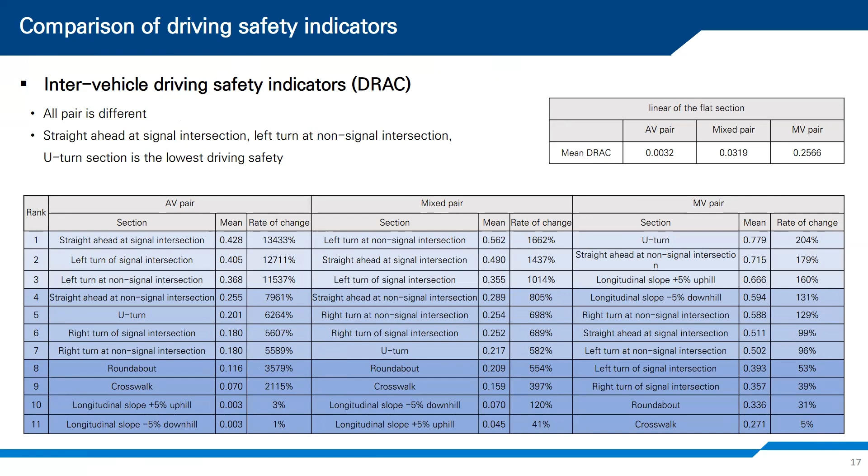Finally, we derive the driving safety vulnerability sections with the statistical method by ANOVA and cluster analysis. Considering the driving safety of mixed traffic situation, this study intends to present the ANOVA result only for the mixed pair. As a result of the ANOVA, significance probability is less than 0.05, implying that the null hypothesis that the sections were the same across all mixed pairs of the evaluation indicators was rejected.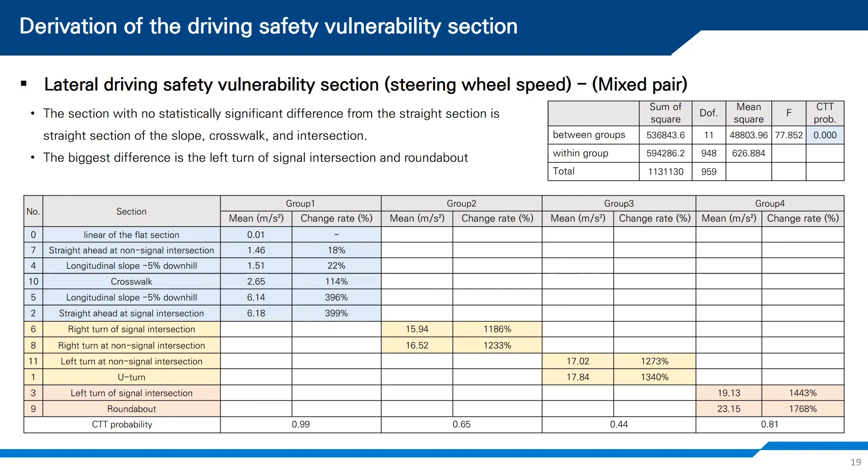So, as a result of the analysis, driving safety of the AV pair is the highest among our safety indicators, and the driving safety of the mixed pair, which is AV and MV driving together, was safer than the MV pair. This implies that the introduction of AV can increase the driving safety of the road.

And the comparison of the driving safety indicators shows that the AV pair has low driving safety at the straight ahead section, and the MV pair shows low driving safety in the U-turn section. In the mixed pair, driving safety was low at the crosswalk and left turn in the non-signal intersection.

And the lateral evaluation index shows that driving safety was low in the roundabout and U-turn section, which has a long curved section, making driving more difficult.

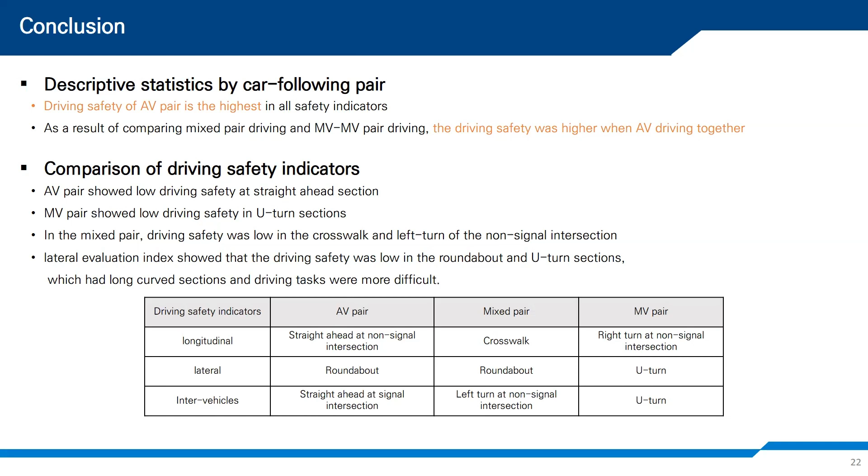And as a result of the post hoc analysis, the intersection was the most vulnerable area in the case of the mixed pair. This is because the stop line in front of the intersection is a point where rapid acceleration and deceleration occurs, and the distance between vehicles closes rapidly.

In addition, it is expected that the derivation process used to identify vulnerable areas of driving safety can be used in other studies related to effectiveness assessment of driving safety and improvement measures. Based on the analysis indicators used in the results of this study, autonomous driving risk intervals and related measures can be prepared according to the actual urban road structure.

The driving safety score of each section can be granted by dividing levels of changing rate, and the safety evaluation can be performed by adding the sections passed in the area where the actual autonomous vehicle is operating. So in future research, the safety analysis of transportation through traffic simulation can be performed. In addition, road structures that have not been implemented due to the limitations of the simulation will be tested using a modeling program, which will enable driving safety evaluation for complex road structures.

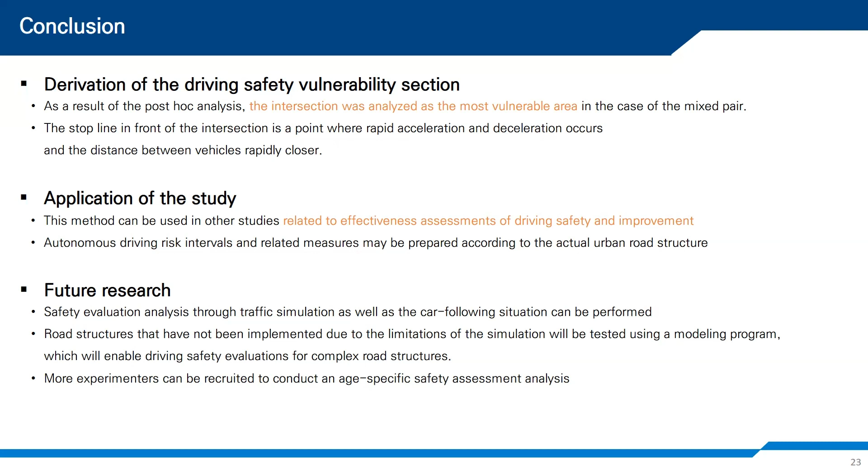This study was selected for the Best Young Researcher Paper Award in Transportation Research Board, and for the Transportation Research Record, this paper is currently under review. This is my presentation, and thank you for listening.

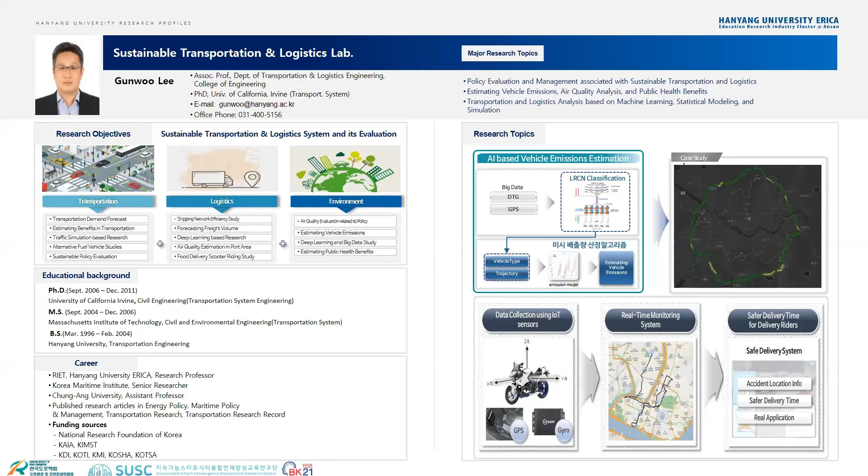Thank you for inviting me here. I'm Nicole Chen from the Graduate School of Mobility in KAIST. My research topic is related to traffic safety and human factors.

Many scholars are focusing on autonomous vehicles because they are expected to reduce crash rates or injury risk. But when you introduce new technologies that offer safety benefits, it usually introduces new risks. So in addition to technological limitations, autonomous vehicles actually face human factor challenges, and we all acknowledge that the current ecosystem is not prepared for the human factor challenges.

In the future mobility system, the technological side is more predominant compared to the human factor side, but insufficient awareness of the human factor challenges will introduce new risks, and we need to take care of the human factor issues related to vehicle automation and the connected environment.

I believe the PhD student is doing very fantastic work. My suggestion to him is that because he's doing safe interaction between the autonomous vehicle and the human-driven vehicle, in the future we will expect a prolonged transition period with actually 3 types of vehicle: the autonomous vehicle, human-driven vehicle, and connected human-driven vehicle.